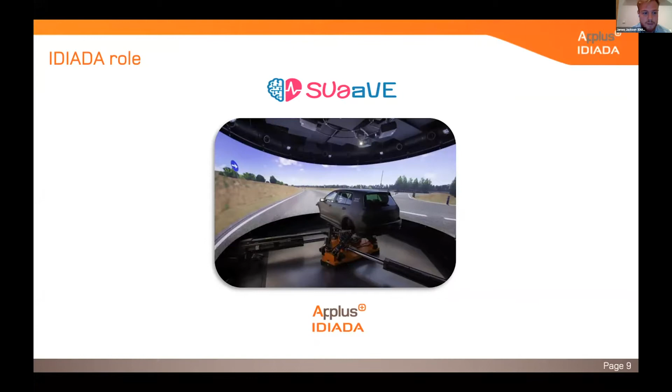Just to summarize further on the IDIADA role, there are 2 key components. The first of these is leading the development of the evaluation framework for the entire project, covering all of those key aspects of acceptance, so ethics, emotions, and comfort.

And then also we are leading the development and investigation around comfort, which will then be integrated into the Alfred concept developed as part of the project.

So just to briefly touch on the Alfred concept, this is based around the passenger and is split into two different units. The first of these is an empathy unit using sensors and other kinds of technology to try and estimate passenger emotions and their cognitive state and then recognize what that is. Secondly is an interface known as ACE, which is integrated within vehicle functionalities. The idea here is to have an adaptive control strategy, which is based upon cognitive and emotional states of passengers.

And then this, for us, is split into two separate areas. The first of these is the ambient cabin environment of the vehicle, looking at aspects such as occupant posture, but then also dynamic motion comfort of the autonomous vehicle itself, which Alfonso is going to run through our methodologies and the work that we've been doing on this in some more detail for you. Thank you very much, and I'll hand over to Alfonso.

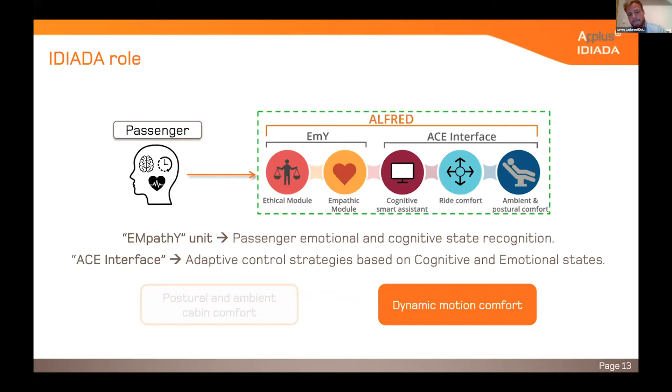Thank you very much, James. Okay, so I will be explaining the details of the work that the vehicle dynamics and the human factor teams have been doing with regards to the evaluation of ride and comfort in our driving simulator.

In the following slides, I will be covering mainly the 5 topics that you can see on the screen now. I will explain the motivation that we have in this project and the hypothesis that we are setting in these experiments. I will take you through the way that we set our experiments regarding the scenarios and how we use our model predictive controller to run these simulations.

We'll give you an overview about the methodologies that we use to collect both objective and subjective data from the passengers or the participants in the experiments. We'll also give you some explanation about how we are approaching the data analysis. We'll finish with some conclusions on some steps of the project that will be interesting.

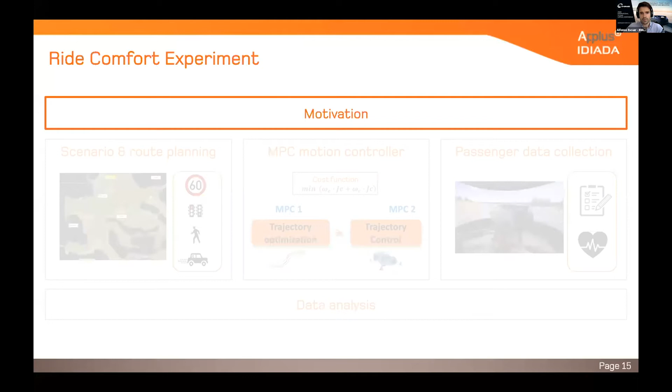Okay, so let's go through our motivation. James already introduced the concept of Alfred, and here we start from the consideration that the trajectory that the autonomous vehicle is going to decide to follow, and the way that it's going to execute that trajectory, is going to have a direct influence on the passenger's ride comfort.

So what we intend in this project is to make sure that when Alfred is designed, we include all these algorithms and criteria to be able to take into consideration the expectations of the passengers for ride and comfort, and to also operate and modify the way that the controller is working to reach actually that level of comfort that we were intending to have.

So our solution here, the other proposal for this project, is to use an MPC motion controller that we have been working on in the last couple of years. Our controller is actually divided into 2 MPC controllers.

One that we call the trajectory optimizer, that actually looks at a predefined trajectory and kind of optimizes and smooths the levels of accelerations and many other variables to make it better from the passenger's comfort point of view. And then we have another MPC controller that is actually working on the optimized trajectory and providing the action controls to the steering, the powertrain, and the brake systems.

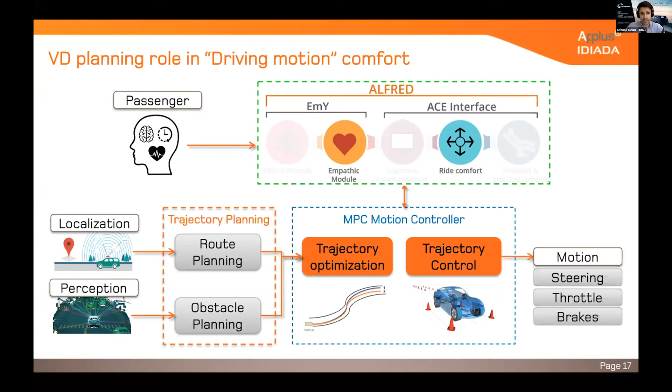So let's talk again a little bit about the passenger expectations. When we think about passenger expectations, we identified 2 different topics that work in conflict when deciding what trajectory we should follow. The first topic is motion efficiency, and the other one is motion ride comfort.

So motion efficiency is related to the total distance traveled and the time spent to move from point A to point B. So here we include, for example, the longitudinal speed of the vehicle, the lateral error, the heading error of the vehicle. And typically in motion comfort, we consider variables such as the longitudinal and lateral accelerations, the derivatives of it, so the jerk, and also many other performance indexes or metrics that we could basically apply or calculate from specific maneuvers that would help us to correlate or explain the level of comfort that the passenger is perceiving.

Okay, so how we combine these 2 things is basically by considering all these variables and weights in our cost function, and then putting them in the optimization process of the MPC motion controller to optimize the trajectory and then give the correct control outputs and the correct motion and vehicle states.

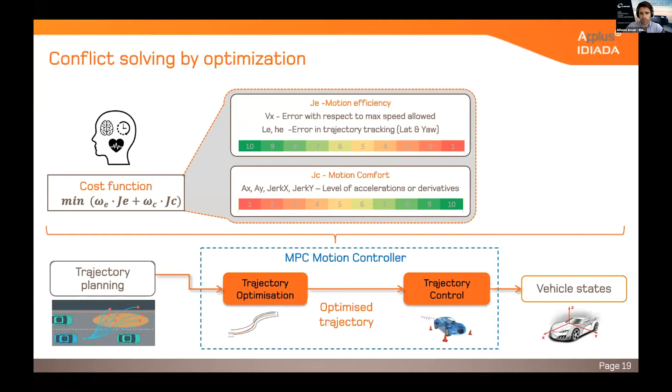But here we want to raise another question, and that is: is the part that relates to motion comfort of the cost function really capable of predicting the level of comfort that the passenger is perceiving?

This is our main question here in this project, and the way we see it is we are actually making one assumption, which is the parameters and the variables that we are using in our cost function. But we can also use the driving simulator and these experiments that we will explain later on to actually validate the proposal that we are doing in our cost function, and also to enrich with further analysis the capability of predicting the level of comfort of the passengers.

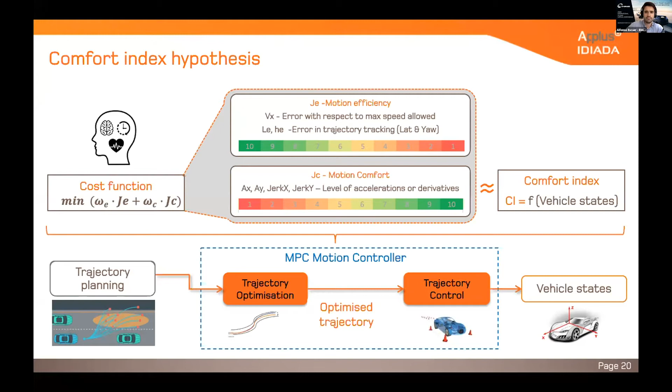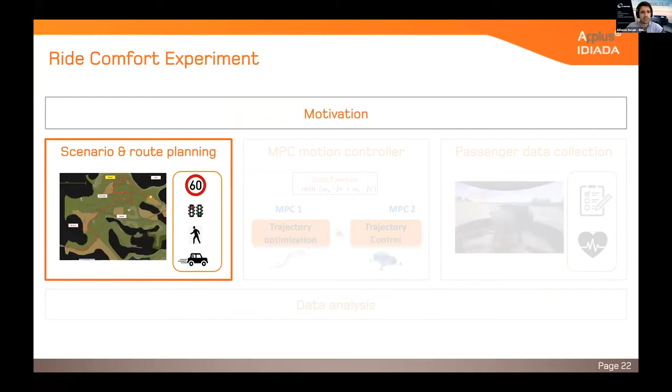Okay, so it takes me to the next part, which is explaining a little bit about how we are setting our scenarios. The scenarios are defined based on some use cases that were agreed within the SUaaVE project. But from our ride and comfort vehicle dynamics point of view, we are mostly focusing on three main areas of testing: rural area, highway area, and urban area.

These are predefined based on the SCANeR European maps, and each of the areas should be tested independently. For each of these independent area tests, we assume a duration of less than around 6 minutes, including even some time for the passengers or participants to provide feedback or reply to questions about their comfort feel. From these scenarios, we are using two different groups of data.

The first group is offline data, which is the minimum data that our MPC requires to define an optimized trajectory. This is basically GPS coordinates of the road center line in a route we have previously defined, the position of some static signals and speed bumps that we use as references as well, and also the locations where we want to stop and give time for the participants to reply to our questions.

Then the online data is used to generate additional test conditions related to moving objects. So we also consider the possibility to create this interaction between the moving objects that appear in our scenario, and how the MPC controller and our logic is going to interact with them to modify the trajectory and do something else apart from what it would typically do on a road without any traffic or moving objects.

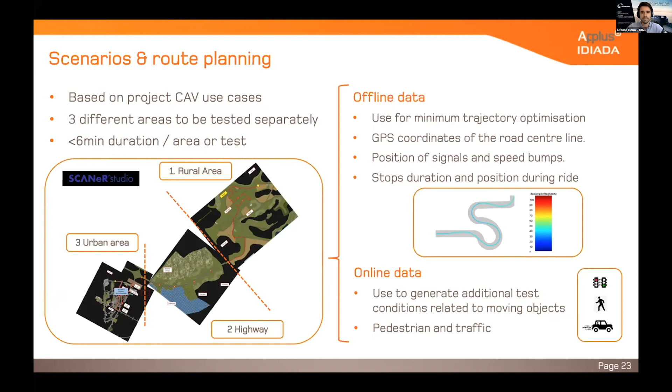Okay, so that was an overview of the scenarios. Let's talk a little bit about our MPC Motion Controller.

We introduced the concept of the cost function, but in reality our cost function has more than 25 parameters that we can change or modify, and that gives us plenty of possibilities to tune and set our MPC Motion Controller.

Our objective here is basically to define at least 3 tuning settings of our MPC Motion Controller that provide 3 different levels of comfort, and that can be easily assessed or distinguished by our expert drivers. So we are targeting to have 3 sets of functioning modes for our MPC, which are the urgent, the base, and the comfort. We start from more than 25 parameters.

We do a pre-selection of them by doing some simulation work we are already doing. And then we also count on the help of our subjective experts and the use of the DIM 250 to actually tune and refine the configurations of our MPC controller, to make sure that those functioning modes are aligned with expectations from subjective evaluation.

Here we show the typical scale that our experts are using during the subjective evaluation, and we are intending to have these different modes matching with a rating or score of 4, 6, and 8, which correspond to poor performance from the point of view of comfort, neutral performance, and very good performance.

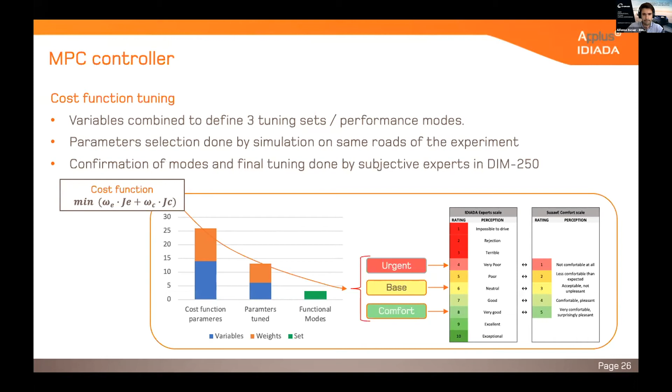Okay, so in order to make everything work, we also faced several challenges to integrate our MPC controller, and we wanted to highlight a few here. The first one is the low speed simulation.

For those familiar with vehicle dynamic simulation, tire models typically don't work very well at low speed. So we had to add some additional controllers in addition to the MPC that can manage these specific conditions. We're also adding some additional logic to work on the blending or integration of these different controllers, and how we get from one to another during the experiment.

We mentioned before the dynamic events interacting with moving objects. So we are adding also that layer of logic to read and use that online data to modify the settings that our trajectory optimizer is using, and this is key basically to being able to simulate those specific events we were mentioning before.

And obviously we also face the problem of compiling and making our MPC controller run in real time, which is something that has been solved by compiling and using the MEX function in MATLAB.

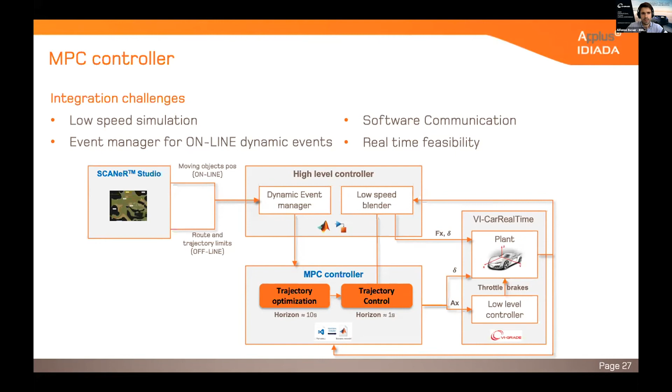Here you can see some examples of two functioning modes of our MPC controller. On the left-hand side, you can see the urgent mode, and on the right-hand side, you can see the comfort mode.

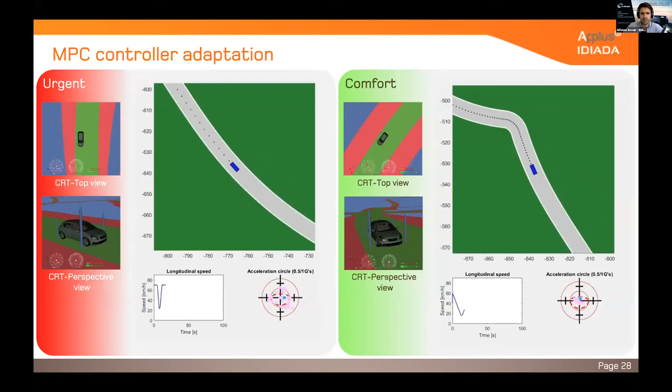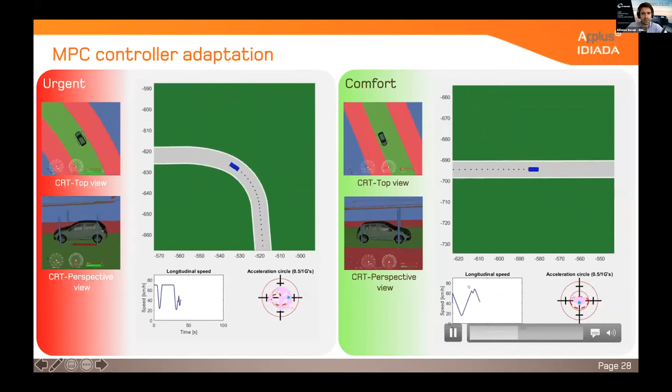These videos are all synchronized in time, but you can see that the level of accelerations in this diagram is completely different between the two modes. On the left-hand side, urgent mode, we reach levels even above 0.6 g. On the right-hand side, we are basically limiting the motion of the vehicle to much lower levels of lateral acceleration. This is in line with the values of speed that the MPC is providing, because it's limited by the accelerations, and because of the different configuration of the weights of the different variables we use in the cost function.

This is just an example. We said we will have 3 different modes, and there's more refining to work on this before we do the experiments itself.

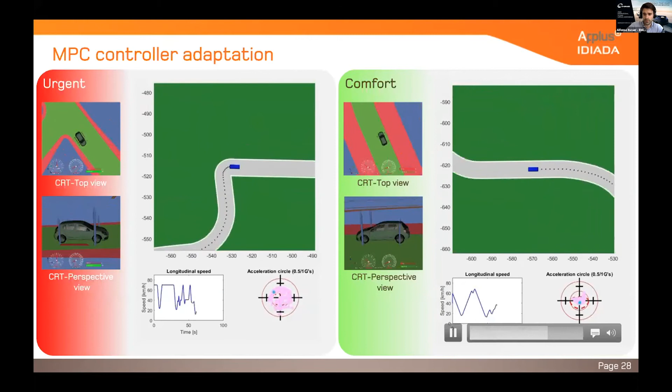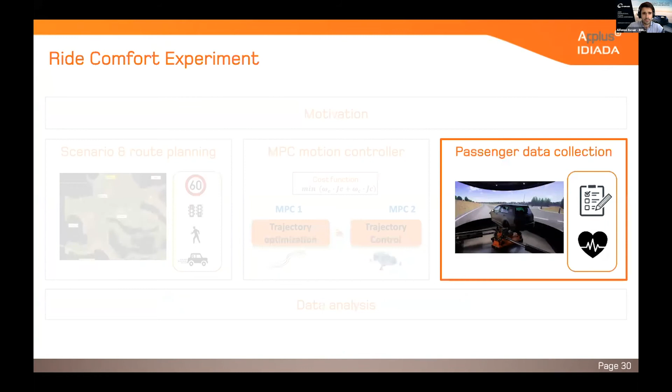Okay, let's talk about the next part, which is the passenger data collection. We mentioned before that we are focusing on 3 testing areas. We have 3 different MPC modes, and we are also aiming to have 10 participants testing each of the areas that we have. So that makes a total of more than 90 tests to be performed within this project.

In parallel, we are also acquiring some objective physiological data to be analyzed and correlated later on with all the rest of the data we are collecting.

We have concerns about how to control the bias of the reference point, because these participants are new, and if they come to the simulator and start testing one specific mode, that will be used as reference for the following one. So we are changing the order in which we test or simulate the MPC modes with our participants.

And we are asking them not to do anything during the vehicle operation. Basically, they are free to focus on the road and the scenario, and we can only ask them to look at the screen when they have to reply to the questions we have ready to assess the level of comfort.

Okay, so the next part is the data analysis. We mentioned that we are acquiring vehicle state variables from the simulator, also physiological data in a continuous way, and we also know the MPC cost function settings.

One of the problems we have is that the subjective feedback and information we collect is not following the same sample rate as the continuous variables. This belongs to specific questions we ask, and we could have around 5 to 10 different questions for each of the test areas we are testing.

So we need to post-process the continuous measurements, the physiological and vehicle state variables, to make sure we at least classify the data within the same section that the subjective data was collected, so we can use it for a correlation analysis later on.

In addition to the section, we are also looking at classifying different maneuvers. So basically, if between a certain period of time there was a braking maneuver, we want to capture that classified, so we are able to apply specific post-processing to calculate metrics useful for the analysis later on.

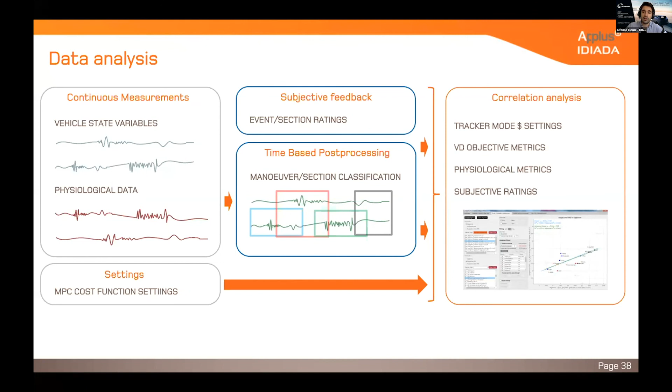In the end, we are combining all these different data sets and merging them to run a correlation analysis. The purpose of this is to identify and assess the level of correlation between our cost function settings and the subjective feedback that the participants gave.

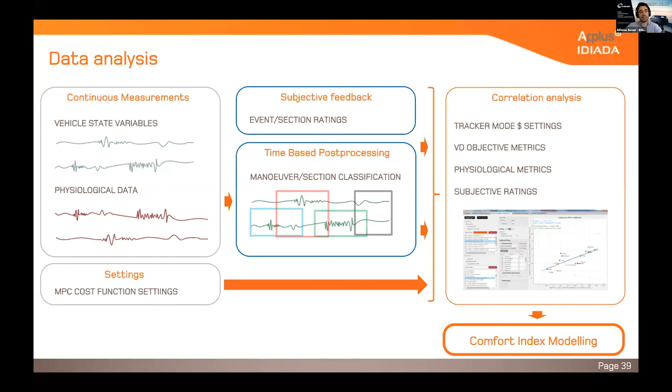The ultimate goal is to enrich and improve the comfort index modeling, so we can have a better prediction for later phases of the project.

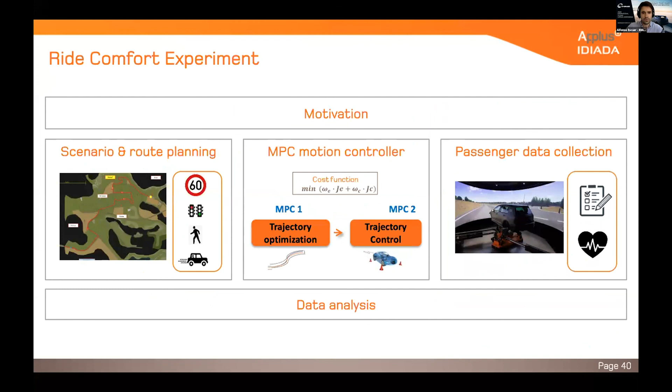Okay, so that was the details of the ride and comfort experiments. I would like to highlight a bit of the conclusions and the next steps we are facing in this SUAVE European project.

First of all, I think the combination of the MPC logic together with the driving simulator is what allows us to assess ride and comfort in an autonomous vehicle in a very highly controlled environment. Without these two tools, it would be very difficult to replicate the same type of experiments on open roads and have the same repeatability we have in these settings and experiments we have presented.

Second, what you have seen, the methodologies we explained, are basically the results of the combined work of the vehicle dynamics and human factors teams. We honestly think this is going to be more and more frequent from now on in the future. This is also part of the learning curve we are doing, at least in IDIADA.